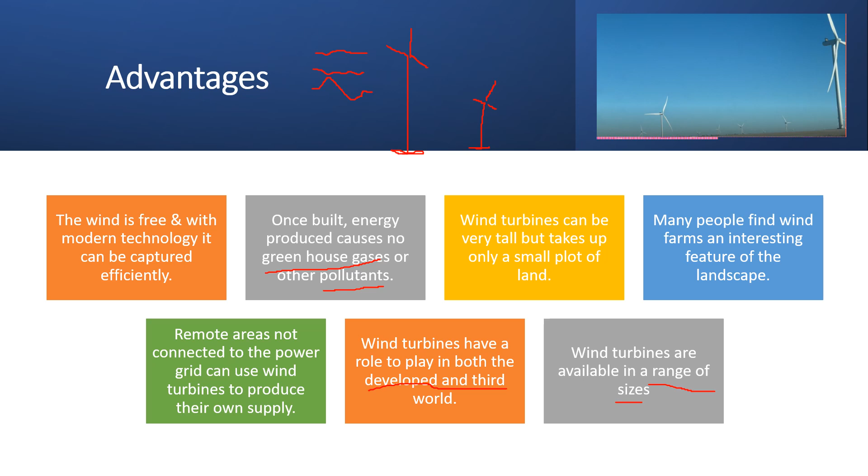So cons, the disadvantages. First of all, you can't control the strength of the wind - sometimes there's no wind, sometimes you get a storm or hurricane. Also, people feel the countryside should be left untouched, because sometimes the wind turbines can mess with the birds flying south or flying north.

One is they are noisy. Some people are skeptical about it because they feel, maybe they are frightened, to see these wind turbines in a farm, so they don't like the look of it. They don't feel pleasant even to look at it. So these are just a controversy.

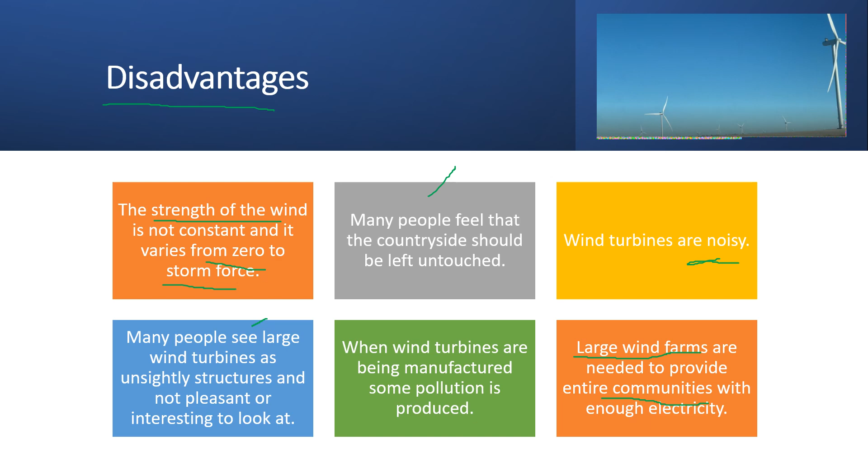Manufacturing these wind turbines comes with pollution. Wind turbines themselves don't produce greenhouse gases, but manufacturing them produces pollution. And you've got to go large in order to provide enough energy to entire communities - we've got to come up with so many wind turbines, meaning very large scale operating wind farms. So anyway, these are the disadvantages of using wind energy.

So let's take a look at the basic design for your wind turbine. It's a horizontal axis, we call it HA. This is just a wind turbine, WT. VA is your vertical axis. So when you take a look at the horizontal axis wind turbines, you can see some parts of it. Horizontal looks like this, we're very familiar with this type, commonly seen outside. So we have a rotor diameter from here all the way to the end, from the top to the end.

We have hub height from the center to one end of the blade. Then you have your rotor, this part harvests the incoming, what we call inlet wind currents. Then here is your gearbox attached to your generator to generate electricity. This is just the stem or tower, and this is your base, and here is just a cover.

Vertical axis, the same thing. We've got the tower, the generator is now on the base with the gearbox, and you can see your rotor in a very different shape and design than this, and the diameter goes from here to here. Horizontal axis design from the top all the way to the end of the other blade - see the differences? And the hub height, the same thing, from center all the way to the end. The rotor height, top to the bottom.

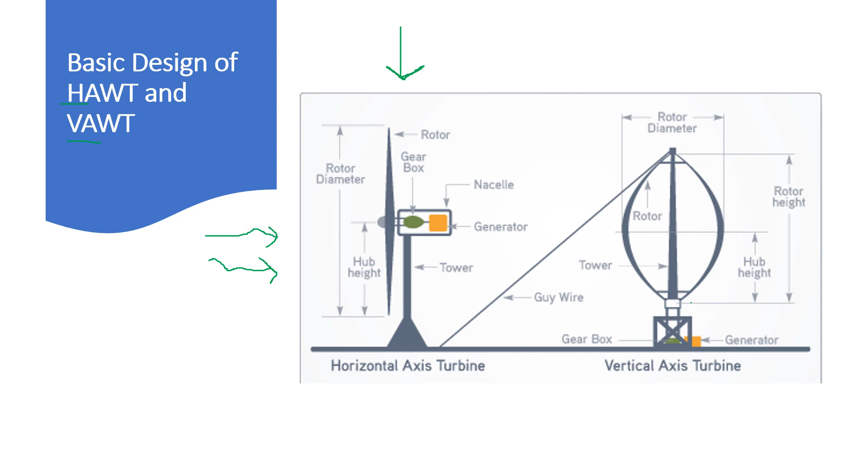From the diagrams, we're going to get into the definitions of your HAs. HAs are your horizontal axis wind turbines. So if you recall, axis of rotation, completely round - so this is your horizontal axis wind turbine. Your axis of rotation is right here, and that axis of rotation, so I can draw that out for you here, so you can see that, is completely parallel to the ground. Here we have a slope, here are some bushes, your ground is down there.

Got it faced to the direction of the wind. That's the only way to harvest the wind energy, and the turbine is going to convert it. Wind again is kinetic energy because the wind is moving, and kinetic energy is the motion energy. Then we change it into mechanical energy, this movement, because this turbine blade's got to roll. As soon as the wind hits, bam, these three blades turn, and that mechanical energy runs the generator to produce electrical energy.

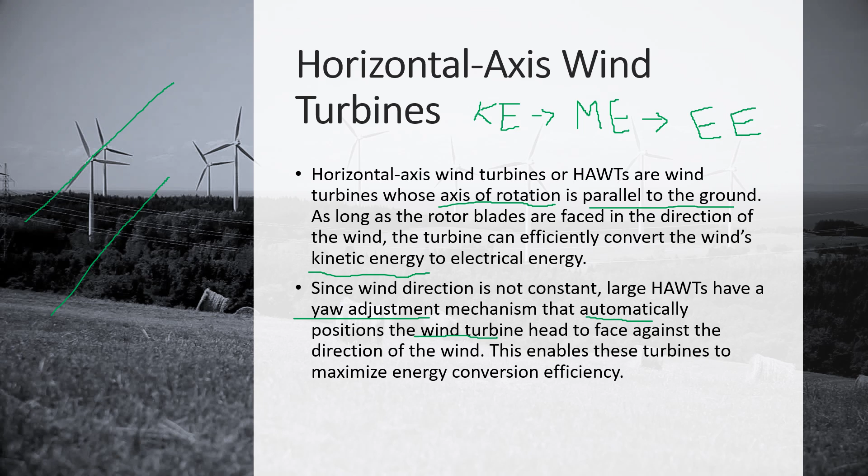Just showing you, still in horizontal axis wind turbine, the design information. Not going to reiterate this anymore, you got it already in your first diagram. Here rotor in meters, 1981, and then we're now in 2000. See the size? It's going up. Ratings get better. Annual megawatt hours, that is the production capability of these wind turbines going up. You can see the trend.

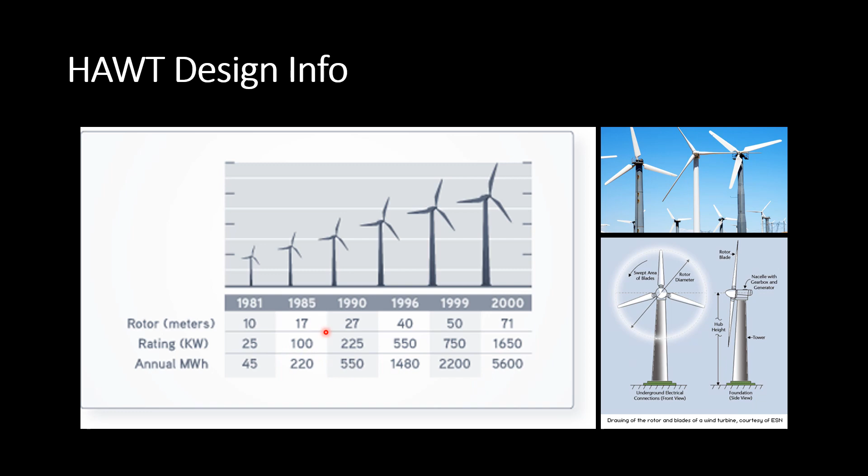The next type is your VA, vertical axis wind turbines. You don't see them outside, they're not commonly seen in the environment. So anyway, VAWT, vertical axis wind turbines, pretty new. They have rotor blades and they spin, instead of the other HA design. Here you can see the design is completely different, and it's parallel to the ground. So here is your ground, parallel, medium parallel, I'm not very good at drawing.

So they can operate anywhere and you don't have to worry about the wind direction, instead of our horizontal axis like this. Since we're doing the spinning mechanism, it doesn't matter where the wind comes from, this way or that way, it will definitely rotate the blades and you can get the mechanical energy and then your electric energy. With horizontal it's difficult, because you've got to face it and also have advanced technology with sensors, automated, to turn if the wind blows from the opposite direction.

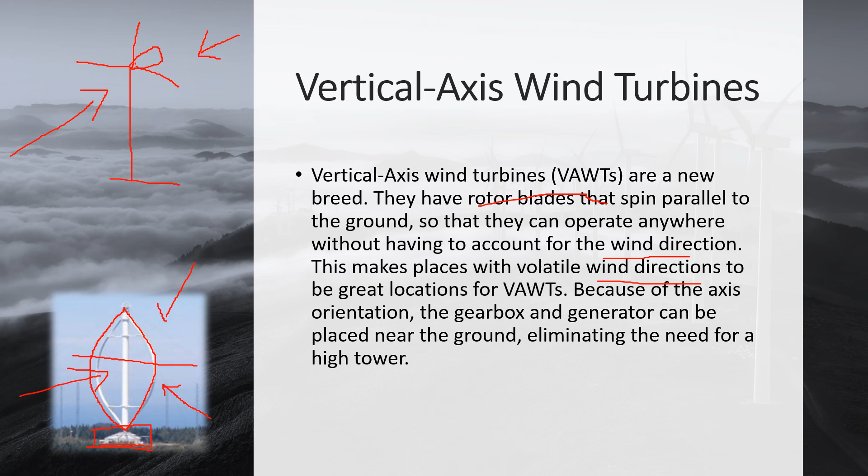So VA, we're going to stick it right into places where your wind goes crazy. Meanwhile, you can't control the direction of the wind one way or the other because it comes from 360 degrees around. So the gearbox and the generator box have got to be right down here, stuck to the ground, because you need to capture the wind from different directions, so we've got to get this box out of the way. Here, the box is up there.

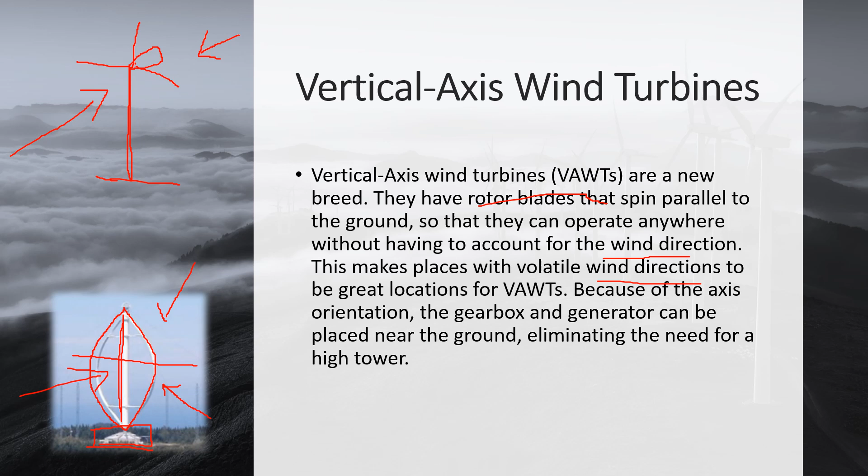So therefore the length of the tower doesn't need to be so high, like in your horizontal axis turbine. Okay, well, that's for your vertical axis wind turbines.

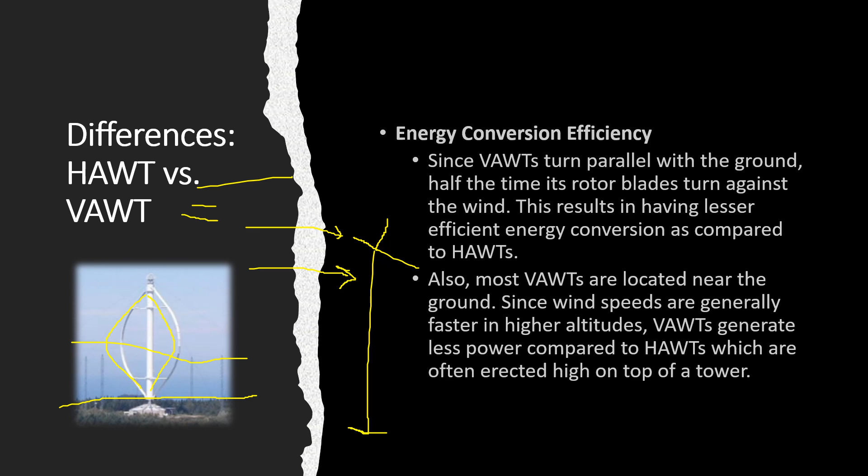And VAs, since their tower is shorter, their rotor blades are definitely closer to the ground, so installation is pretty easy compared to your horizontal axis wind turbine, which needs to go all the way up. So here you've got to put more time into installation. This one is pretty straightforward. Of course, you get more power this way than the VAs.

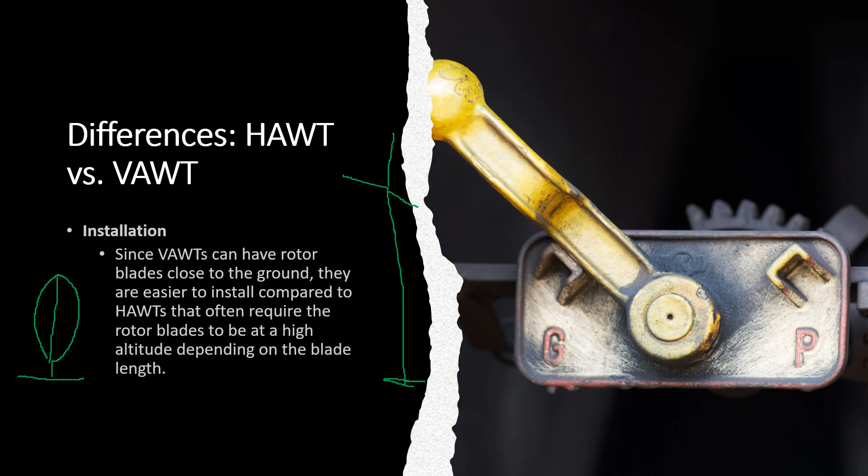Now we'll get into maintenance. For the same reason, the VAs are shorter, therefore it's easier to maintain. HAs are higher, so you need technology to get up there to maintain.

Traditional HA, you've got to check constantly to make sure it's facing towards the wind and not against the wind. But if your HA has a yaw adjustment mechanism that's automated, you don't have to worry about it, because HAs without this automated yaw adjustment mechanism definitely need constant maintenance to get the best wind direction.

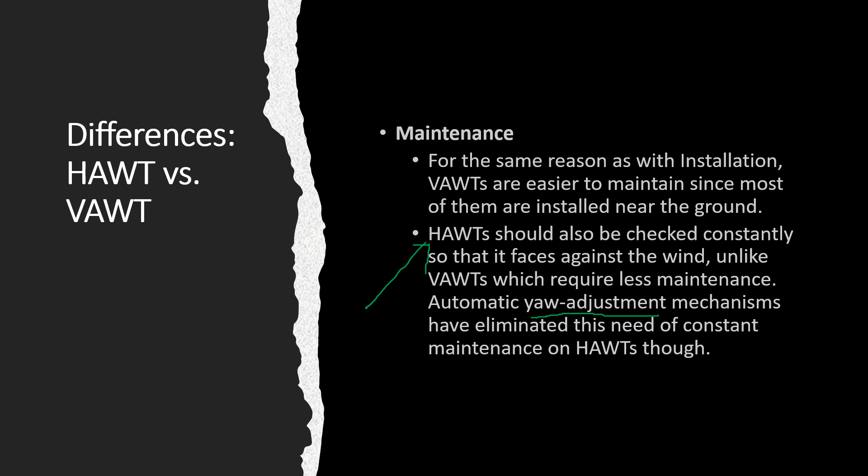Land area requirement. When you think about the HA, they require a higher tower erected just straight up into the air, so it can reach the higher altitude winds. Higher altitude winds, as you know, are faster, so they have more energy.

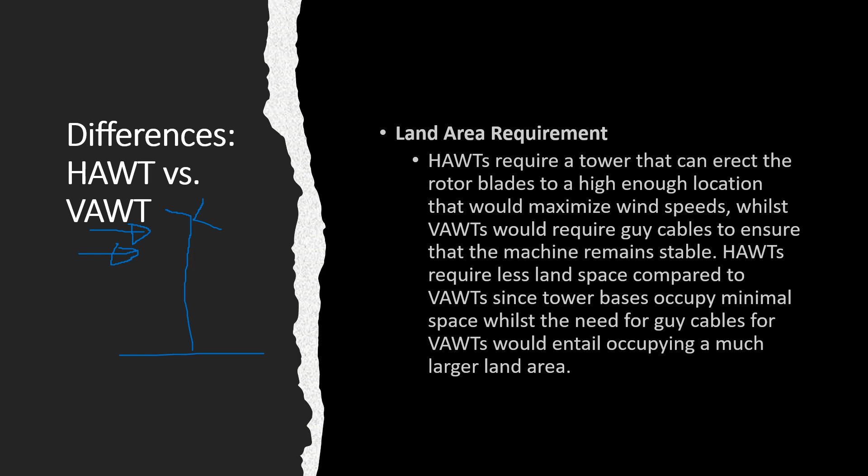And for vertical axis wind turbines, or VAs, you need cables to stabilize the machine. The windmill, the traditional HAs, they don't take up a lot of space, so the base is just right there, taking up a very small plot of land. The same thing for VA, it doesn't take up a lot of land either, but the issue with the VA spinners is they need the cables, and that cable can take up more land.

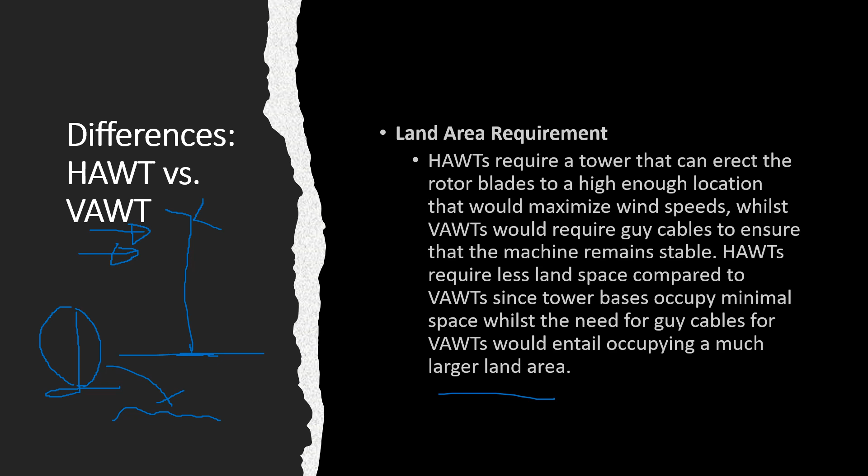So VAs can spin and catch the wind in different directions, but still they produce less power, and also come with cable complications.

So here we're looking at some data, and you can see there is a trend right there. We take a look at the data in 2005, and then we go into 2015, that's 10 years. In 2015, you take a look at the value right here, and you got 63 gigawatts. Giga is 10 to the power 9, so that's a lot, right? And we started out right here from 12, 12 gigawatts into up to 63 gigawatts.

So that's the wind power generation, of course this is the worldwide data. If you calculate and do the math, that's about a 22% increase from 2014, because in 2014 we only had 52 gigawatts. So here we can circle it so you can see.

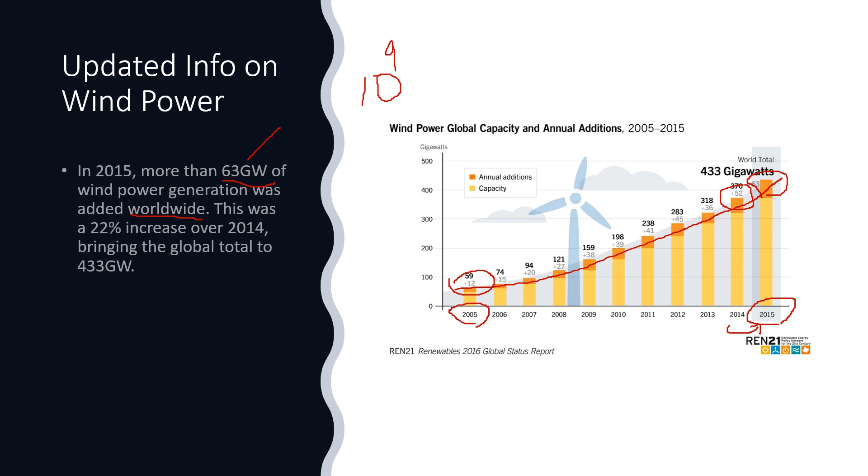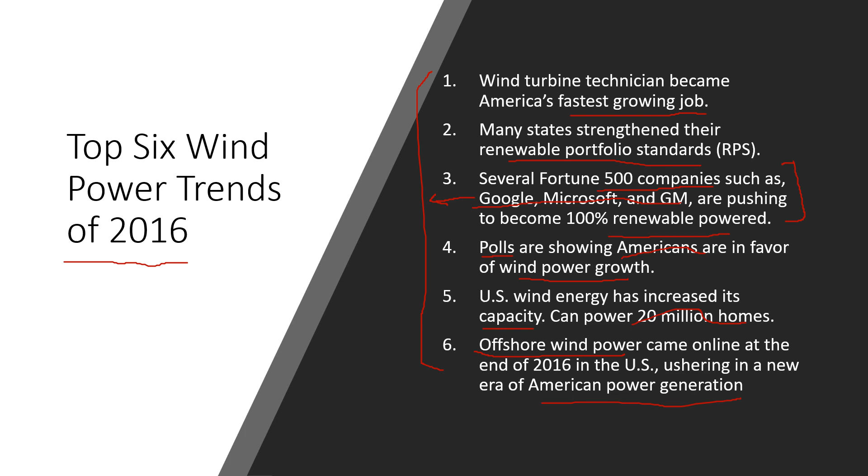Let's draw with a different color. So anyway, ocean wind and ocean currents are very important because they carry tremendous energy when they move, because there is great mass in them. So when large masses like that are moving, we can definitely harvest that energy - even to divert the hurricane or tornadoes or tropical storms. You can break them down, or weaken them before they hit the people and the homes and the businesses.